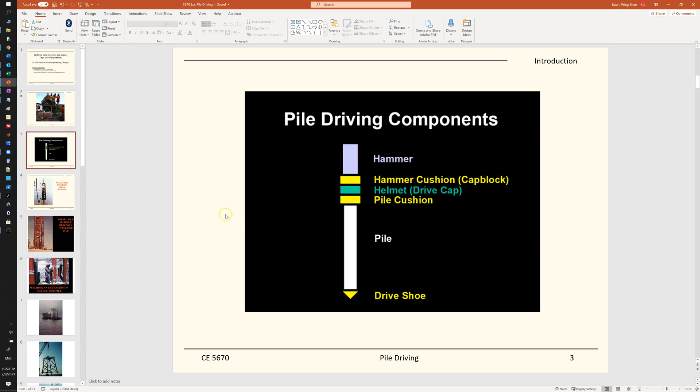Which type of different method or what kind of hammer we use is kind of beyond the scope for this class, but it's like an art of geotech design. You need to find and calibrate yourself before you drive the piles.

You need to do all the engineering analysis based on your soil profiles, like the bearing capacity of the soils, and whether you're hitting the bedrock. You should know all this information.

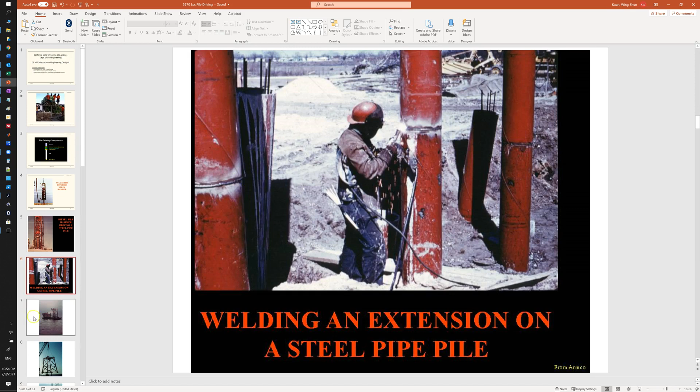Geotechnical engineering also takes care of offshore structure foundations, particularly from the 60s to 80s, the golden age of the oil industry. Now maybe we're shifting to renewable energy, like building offshore windmill foundations, which is another monster and a different type of challenge.

We may not go to deep sea for near-shore windmill projects; you'll have foundations at different soils, likely dense sand, rather than going to the deeper and deeper seabed offshore for oil.

A couple decades ago was the golden age of geotech engineering in the oil industry. We built tons of offshore foundations in the North Sea between Norway and England, also in Western Australia, and in the Gulf of Mexico near Houston. There was a lot of fancy offshore oil platforms to build.

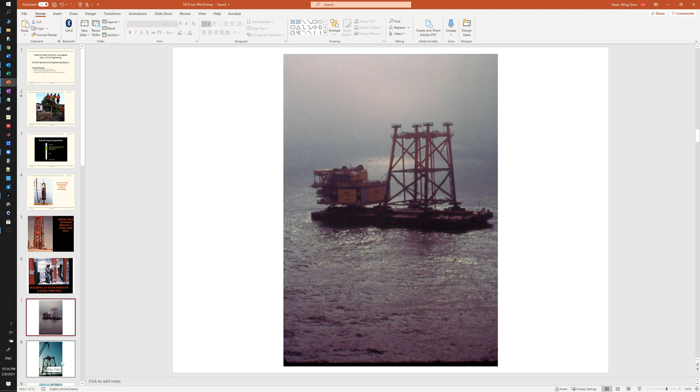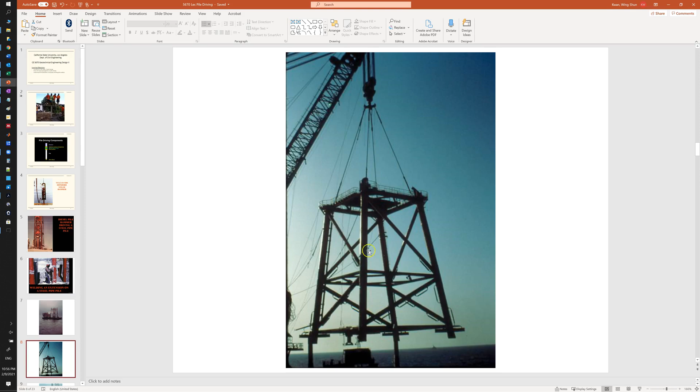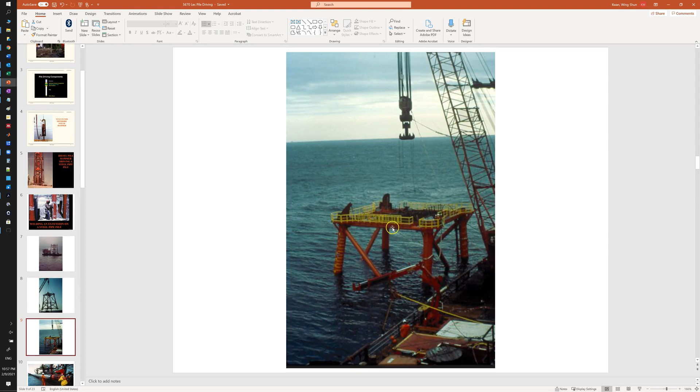Here's an example of an oil platform. In order to get the oil, we need to stabilize this platform and drive the piles in offshore environments. That's another challenge. You see the crane there - this is a foundation platform with four supports that you're going to drive piles through. We lower this kind of platform to the sea, to the proper locations, and then those are the piles we're going to drive.

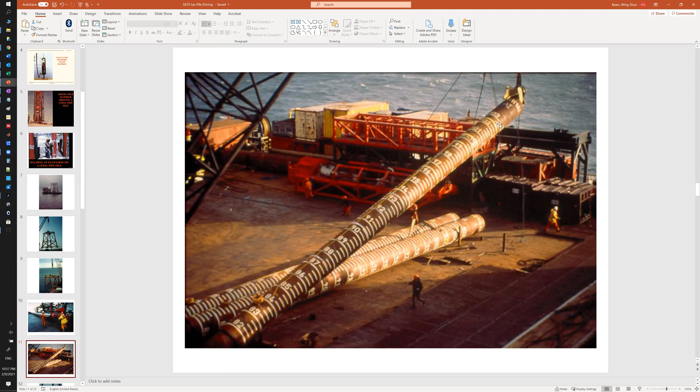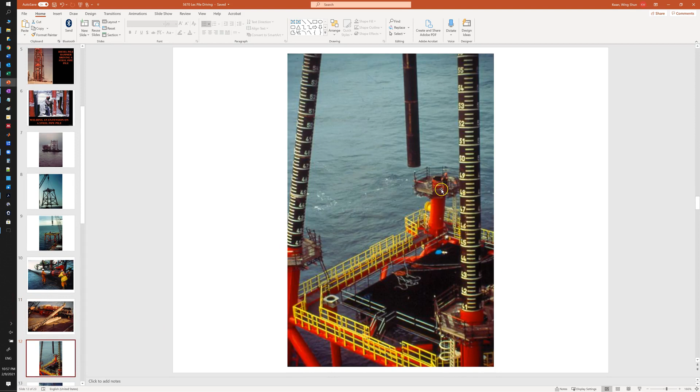It's very fancy, super long steel piles. We lift it up - this one is up to more than 100 feet, I think even 100 meters. We install those piles on our oil platform, and we do the pile driving at that point.

What we try to learn in this lecture is through those dynamic poundings, dynamic driving of piles, we try to retrieve the information we need.

Remember back to our undergrad class where we talked about axial capacity of piles. We use those static methods, the alpha method, beta method - those give you analysis results. But think about it, when you drive a pile, you get all the information, the response of the pile and the blow counts when you're pounding on the piles, and that information can help you confirm your design or give you additional information.

That's why pile driving is another huge topic in deep foundation design. It can complement the static method we learned - alpha and beta - or sometimes it can be even better. In a scenario like offshore environments, it's really hard to get soil samples or do geophysics or site characterization to know the soil properties deep sea, because the depth of the water until you get to the seabed could be another 100 meters. The best chance for us to get the response of the piles or more accurate information is by doing the pile driving.

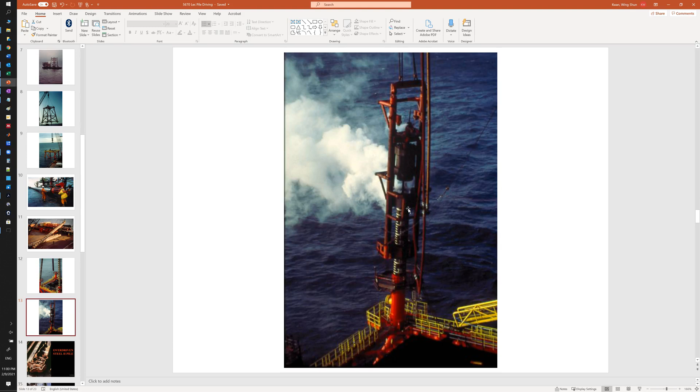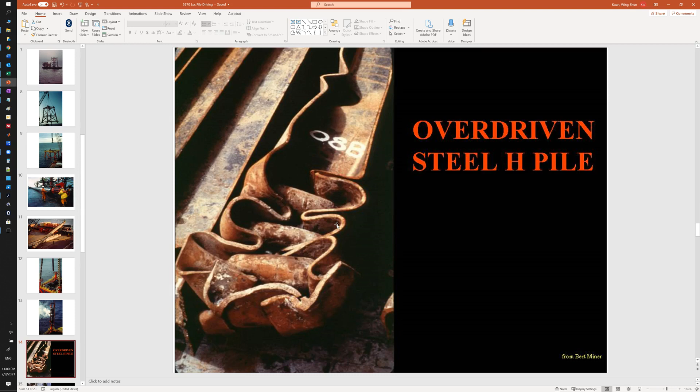So this is pile driving, and that's what we try to get to in this lecture. Again, you don't want to overdrive your piles. If you overdrive your piles, the hammer is too much for the soil - meaning the soil is too strong and also the hammer is too big. Then overdriving of the piles could happen. You really don't want this to happen.

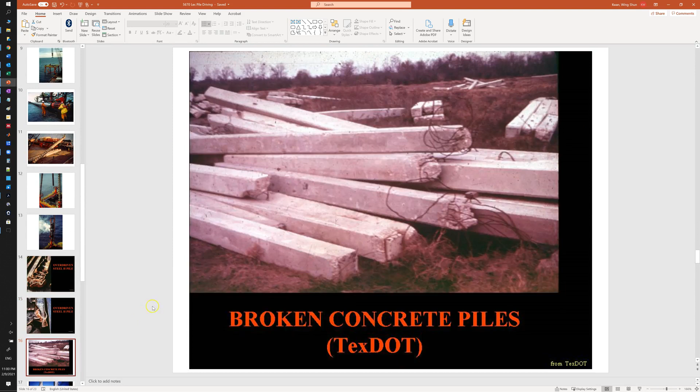You can also fail the concrete piles. A failure of precast concrete piles - if we didn't do our job properly, this could happen.

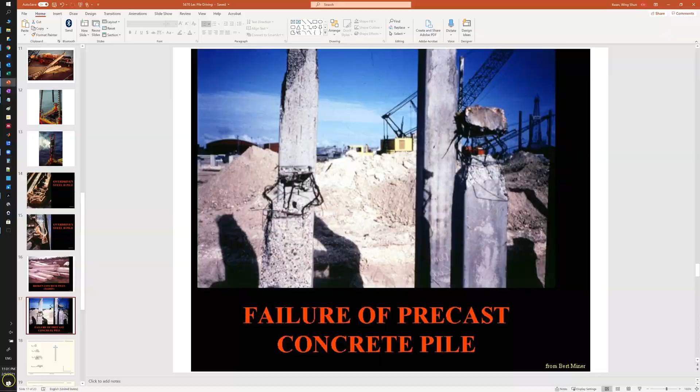Okay, so pile driving formulas. In the early days, to analyze what happens to the piles when driving, you start with some basic assumptions. First, you assume that the body of the pile is a rigid body in motion. And based on energy conservation equations...

They came up with this formula below, which gives the ultimate pile capacity under driving. This is different than the static pile capacity - the two can be very different. The dynamic capacity during driving versus the static loading capacity are under different loading mechanisms. Static loading versus continually pounding on the piles gives different loading mechanisms, which can end up giving a very different ultimate capacity.

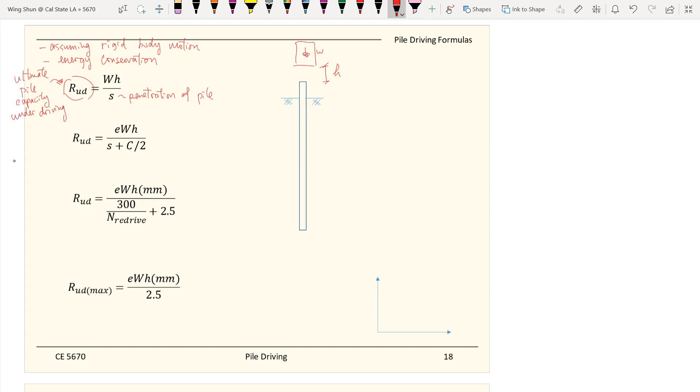But it comes with a lot of shortcomings because it does not reflect what really happens when driving piles. First, the shortcoming of the equation is that you must have energy loss.

So energy is not conserved. There are a lot of different kinds of loss. You lose some to sound, right? You remember how loud it can be when driving piles. You also lose a lot of energy to friction when you're pounding the piles. There's friction loss to the soil, and also friction loss when the pile pounds on the helmet and on the cushions. The cushions, the wood cushions, are meant to absorb some of the energy so that there's no direct metal-on-metal contact, and that also causes a lot of energy loss.

Second, the pile is not rigid. It's not a perfectly rigid body because it's under very high stress loading. So no matter what, the pile will compress elastically, or maybe even fail. Also, it's not a one-way kind of penetration.

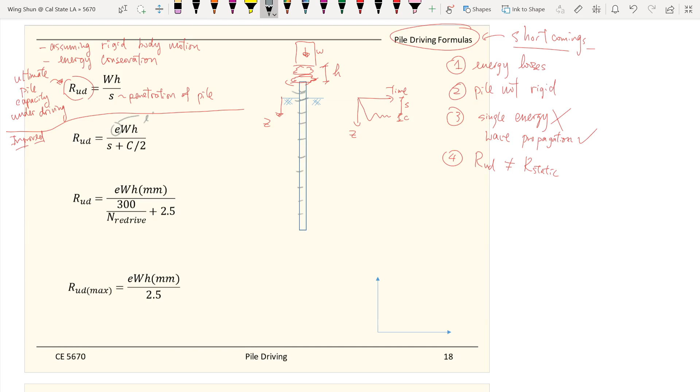In light of that, there's another version, an improved formula - the second formula. So does it improve on the first one? It makes some slight changes. It has an effectiveness, or efficiency, factor to try to capture the energy loss. And in light of the shortcomings we mentioned, it now has a second term - this is the elastic rebound that we talked about.

Another improvement, or way to make it more practical, is the formula below, which tries to represent the penetrations by the number of blows.

So this N here is equal to the number of blows per 300 millimeters of penetration. Making it more practical is just by setting a certain interval, which is 300 millimeters. So every advancement of 300 millimeters, they keep counting the number of blows from the pile driving, so they can set up.

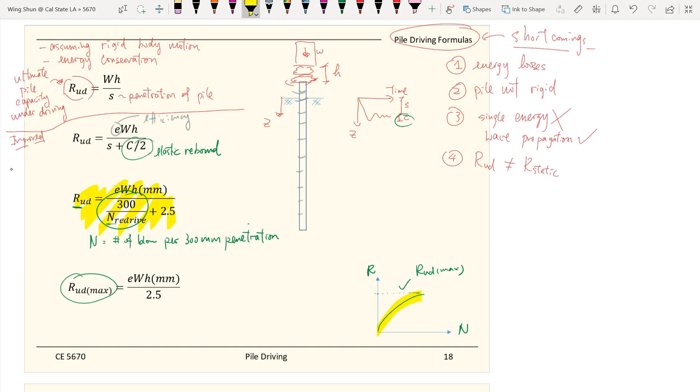of the driving process. But the big picture here is what we learn from this: these simple forms of pile driving formulas are simple. It's a good starting point, but they cannot answer all the shortcomings that we talked about.

In the very first versions of the equations, you didn't talk about energy loss, even though we try to capture it with the efficiency factor here, but it's still not fundamentally looking at this problem correctly, because it still doesn't answer the part that the pile is not rigid, and also doesn't answer

the part that this is actually a wave propagation phenomenon, not just a conservation of energy setup, and also it's just not able to tell you the information about the static pile capacity.

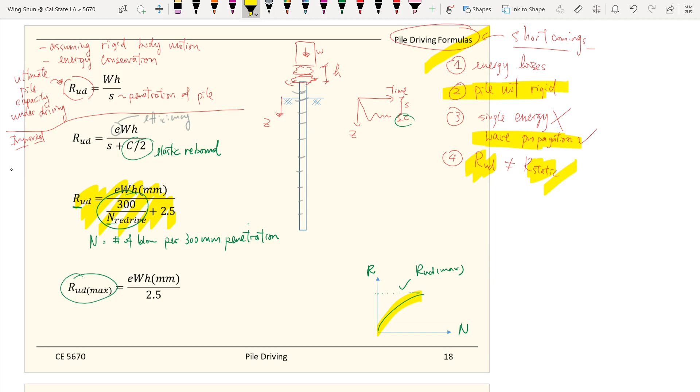So we need something more advanced to look at this complicated issue, which we will talk about: wave propagation analysis. So if we look at segments of the piles, we talk about how the wave propagates through

a pile in terms of velocity, and this is useful for finding the pile's information during dynamic driving. This wave propagation method is found to be more reliable than the other pile driving formulas that we talked about in the previous two slides.

So using a more physics based approach can get around the shortcomings we have, because now we're looking at velocity rather than global energy. So we focus on how the particles of the pile propagate throughout the driving process, the pile driving process.

So in a way this is more fundamental and more science based, which will give us more accurate results. But again, there are some assumptions going on, and another trade-off is it requires much more computational power and a basic understanding of physics and math from engineers.

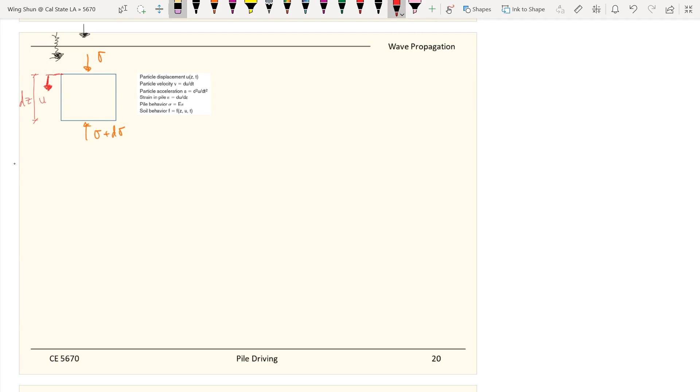So this is the traveling velocity - the particles are traveling. There are many small particles traveling through the pile, because the pile is made up of many small particles. Let me do a better job here.

So the displacement u will change with depth and with time. The way the pile particles travel through the pile depends on depth and also depends on time. So it's a function of z and t.

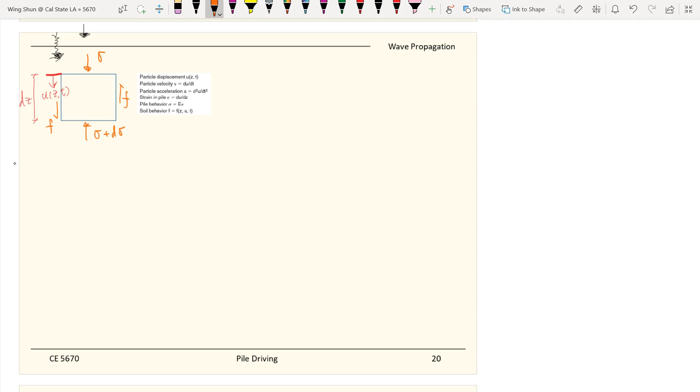And also we have our side shear, because the pile is jacking along with the soil. So we have F here, which is the friction force, which we call the soil behavior. These are functions of depth and the particles as well.

So U here is the particle displacement - how the pile is actually moving at a very small scale. And once we know U, if we differentiate that, we get the particle velocity.

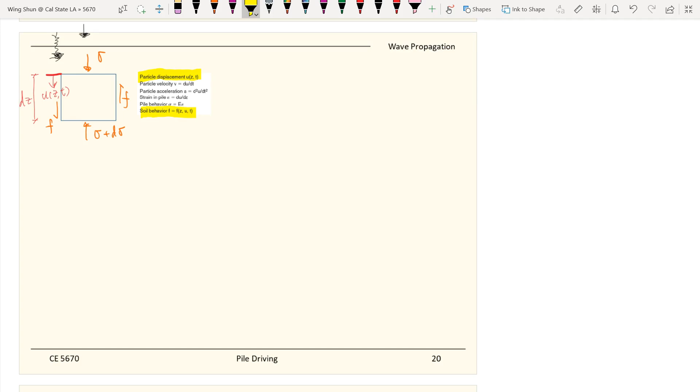And if we differentiate one more time, we get the second order differential equation that gives us the particle acceleration, and the constitutive model of the pile, which is perfectly elastic here.

So we have the perfectly elastic pile, which means the pile stress-strain behavior - this is the strain, this is the stress, it's perfectly elastic, described by the elastic modulus E.

And the strain in the pile will be defined by epsilon. Epsilon equals du/dz, the change in the vertical direction of the pile displacement normalized by the change in the vertical direction, z.

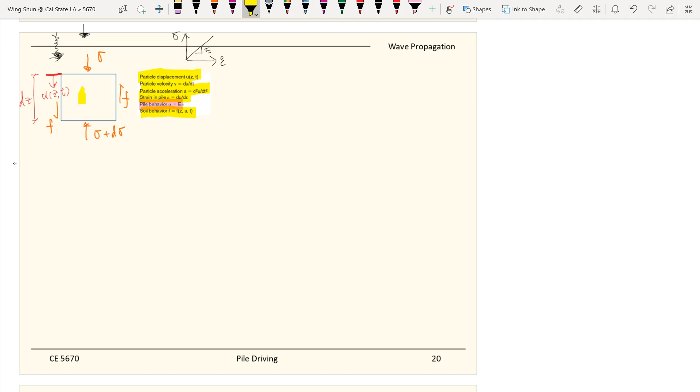And we have the counter force, right - this is Newton's second law. Overall, the movement of the pile is the mass of the pile times the acceleration of the pile.

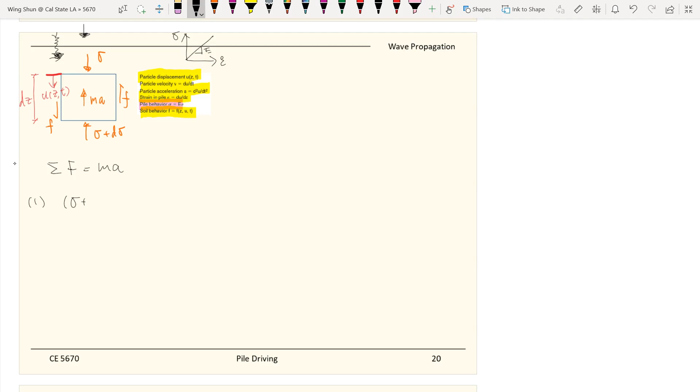And if we apply Newton's second law, F equals ma, and the force that we have - A is the area of the pile, so the upward force minus the downward force, plus the side friction.

And this P here is the perimeter. So we have the pile perimeter times the side friction, times the vertical segment. That gives us the side shear force.

So this is our force equals the mass of the pile, and the mass of the pile is the density of the pile times the area, times dz. So A times dz is the volume, which gives us the mass of the pile, and then times the acceleration of the pile.

We differentiate the displacement two times, then we get the acceleration. So F equals ma.

And we also consider the constitutive relationship of the pile, using the perfectly elastic model to describe the stress-strain relationship. So the stress will equal the Young's modulus times the strain - the Young's modulus of the pile times the strain, which is du/dz of the pile.

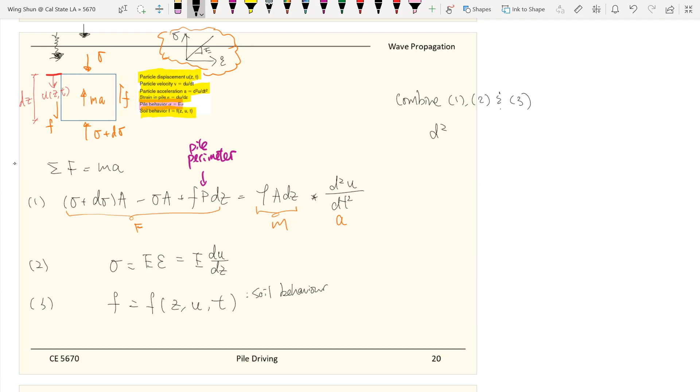And if we combine the three equations, then we get this differential equation to describe the wave propagation during pile driving.

So again, the E here that we talk about is the pile modulus. And this particular term we talk about here is the pile acceleration, or the pile particle's acceleration.

So this equation here pretty much is the governing equation of wave propagation. So if we want to find more pile information, like during driving, we solve for these equations, and the computational package software that you use for pile driving pretty much uses a finite difference approach to solve for this second order differential equation to try to capture the physics behind pile driving, treating the pile as moving in terms of small displacements that change with depth and also change with time. That's why it's differentiated by dz and also differentiated by dt, capturing the soil behavior in the third term right there.

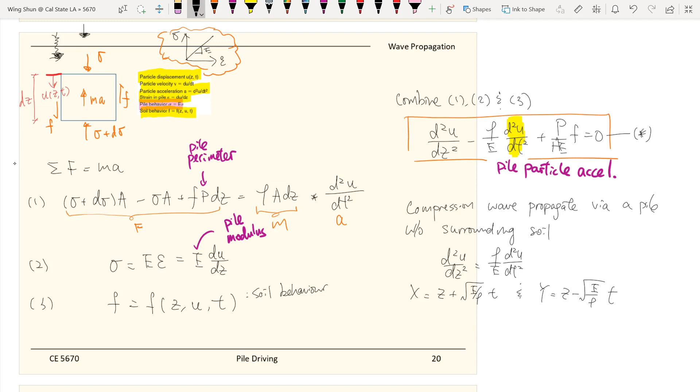So here, what we're doing is purely mathematics. We play around with the differential equations by making some substitutions to simplify the terms or equations with mathematical terms, but not really changing anything, just playing around with the terms, and then we substitute x and y into this two-term second order differential equation.

So this double star equation becomes a much simpler form with the two transformation terms that we have made.

And then here we realize we solve for this, because at the end of the day, what we're interested in most is U, which is the pile displacement. So fundamentally we want to understand when we drive the piles, how much movement there is in the pile. We set up the differential equations. If we're able to solve these differential equations, then we can solve our problem, because we can mathematically model how the pile behaves, moving upward and downward, when we're driving the piles.

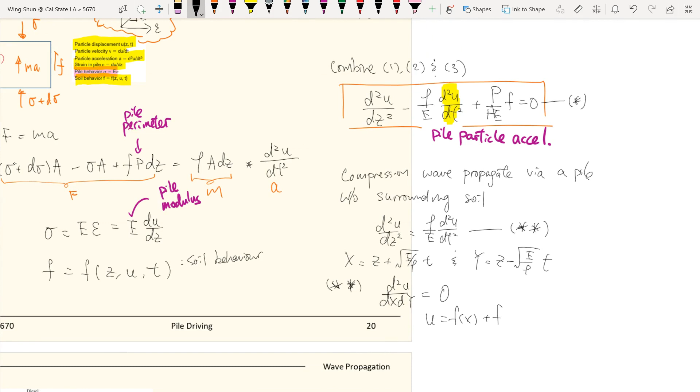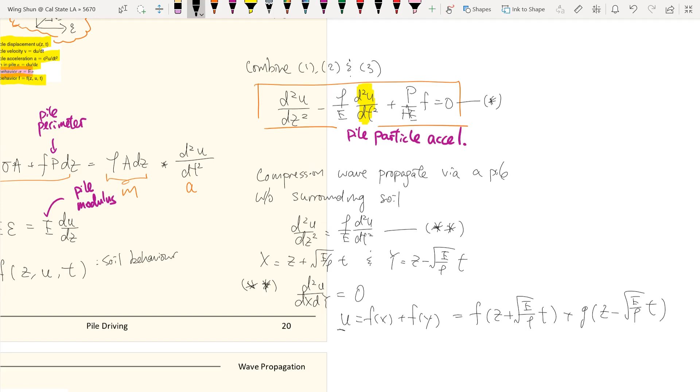So the displacement will depend on these two functions, and we understand when we drive a pile, this gives us the displacement, giving us an idea of how the pile would behave when we drive it. So at a certain location, depth, at time t, versus at a location that's further down, with travel distance of delta z, and then at time plus delta t.

So if we make use of time steps here. Another concept that's very important when we solve these differential equations is that we want to use time steps. So next we will do examples to see how, numerically, we can solve for those equations by considering time steps.

So now we have a time step of delta t here, by traveling a small segment of the pile. And if we want to find out the velocity, the wave velocity here, we call it C, and it's the change of displacement divided by the change of time. This is the wave velocity.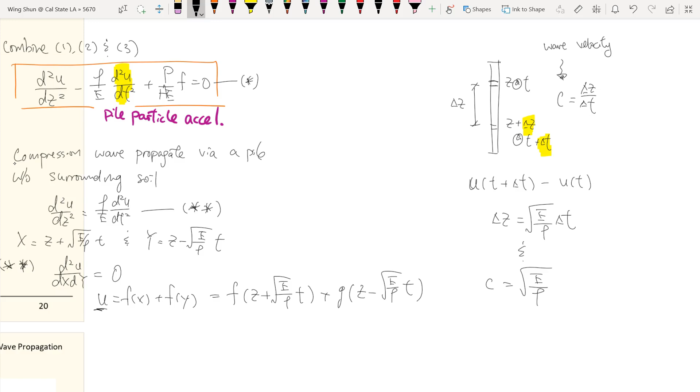So we can simplify the wave velocity in terms of the material properties by making some assumptions to get there. So what we're doing here is just trying to physically understand what's going on, or walk you through the physics behind wave propagation in the problem of pile driving.

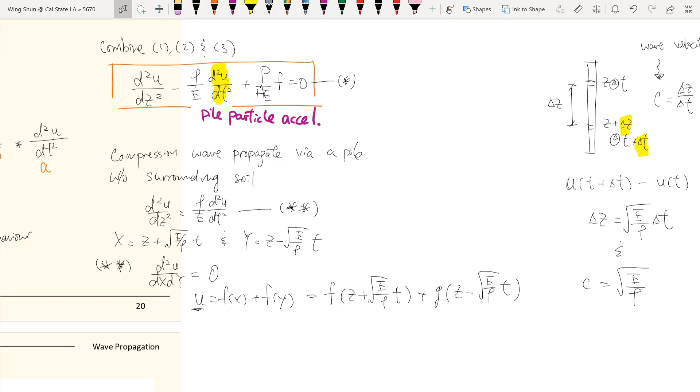Next, we will do examples of how to make use of this framework of wave propagation to model actual piles, driving piles, using a finite difference approach by hand to walk you through how to work out the math. Now let's talk about a numerical approach to solve the wave propagation problem in piles during pile driving.

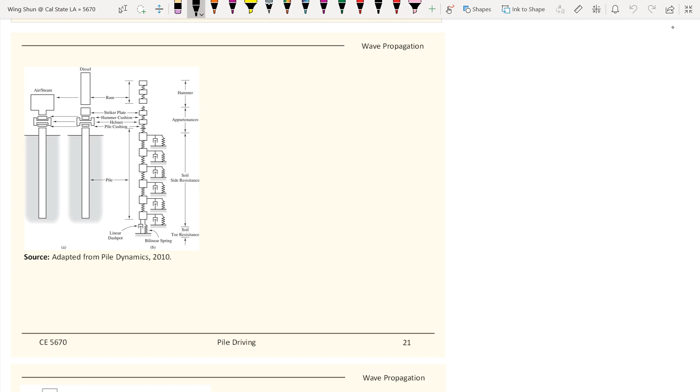I'm talking about pile driving. You have different components: of course the piles, and also the hammer. The hammer can be a diesel type of hammer or a steam/air type of hammer. Then you also have the connection part, where the strike plates, the cushions for the hammers, the cushions for the piles, and the helmets are. That's another segment of the piles, and all three together make up the pile driving mechanism. The discretization helps us use a finite difference approach to solve this wave propagation phenomenon.

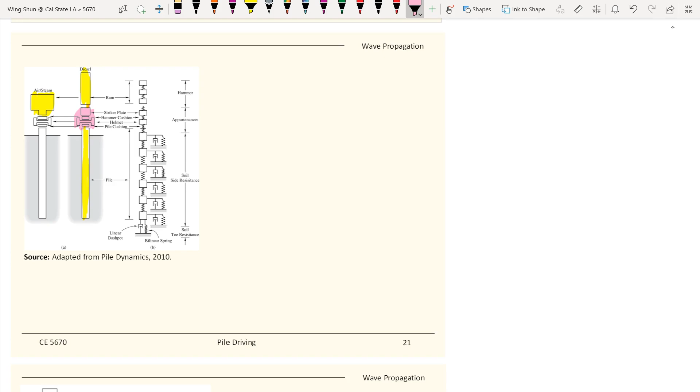So for example, here it has at least three parts. First, you have the hammer part: you need the weight and also the stiffness of the hammer. That's the first part. We break it down into different parts, and you assign material properties for each.

The next basic part is the part that connects the hammer and the piles, so all the other stuff like the hammer cushions, the pile cushions, the striker plates, and the helmets. With that, the same thing: you also need the weight and the stiffness to describe this part.

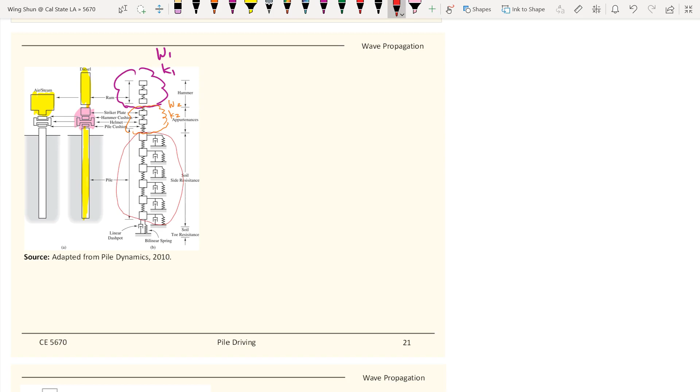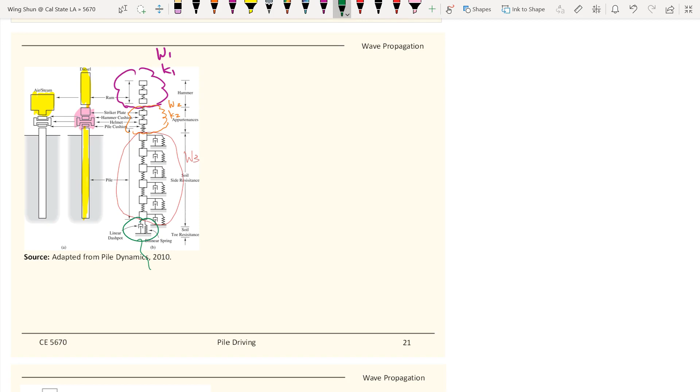Last but not least, you have the piles, for which you need to talk about the weight. When I say the piles, I mean to include the part of the pile excluding the pile toe - that's the third part. And here is your pile toe, which you would describe with a Q-z curve.

So that's how we do it: we break it down into many little parts, and for each element we assign the weight and the stiffness. Now, basically, I only broke it down into three different parts, but actually within each part you need to further break it down into more and more elements. The more you have, the more accurate your numerical analysis will be, and when you're doing computer programming, you will break it down into many.

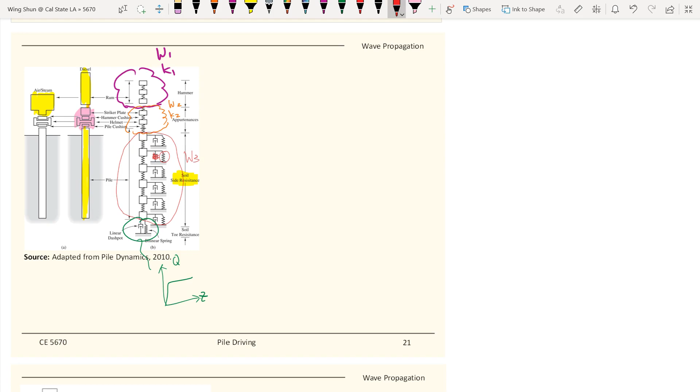Remember the wave equation has the dz terms there, which means the pile displacement properties highly depend on how far down you go. The soil behavior, and the dashpots representing damping, and the spring stiffness, all change because the further down you go, the stronger the soil is with more confining stress. Each spring has its own stiffness, and those stiffness values and the dashpots representing the damping of the soils need to be updated.

But for the examples we're going to do, we will just base it on three elements as minimal so that we can do hand calculation examples. So how the numerical analysis works is we look at different wave propagation information within the piles during pile driving.

The first thing we want to look at is the displacements of the pile particles. So the displacements of the piles at a certain time step. This m here is the mass number.

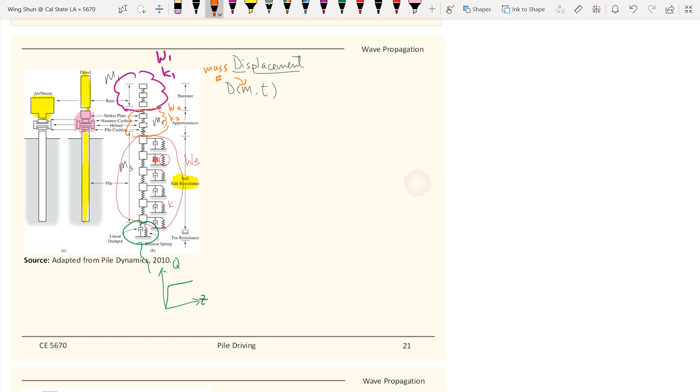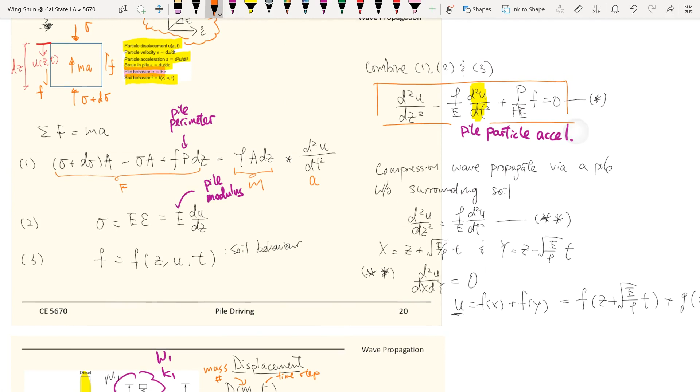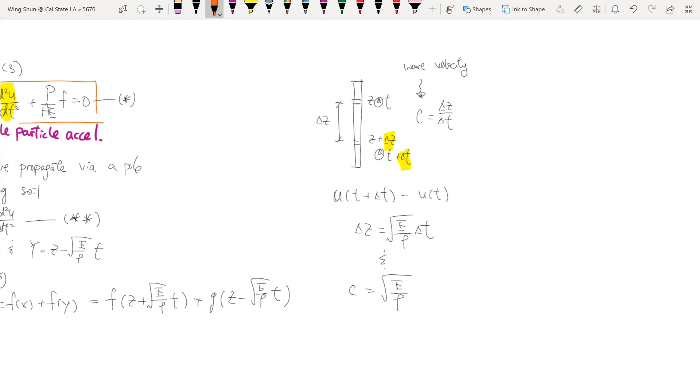This time step is the same dt in this formula, and in these equations. So the time is at certain time steps of the pile particle traveling. The next time step will be t plus delta t, so that's the next time step.

For the next time step, you need to know how small the delta t is. The delta t recommended by the original author for this wave finite difference solving approach is delta t equals delta L, which is the length of the elements. In this case it's the whole pile, but in real computations you do this for each element. So it's delta L divided by the square root of the modulus divided by the density of the piles. That is the recommended time step.

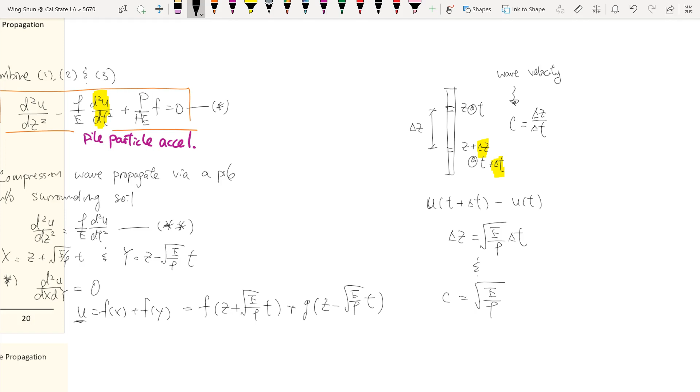So what we are doing here is numerically looking at small segments of the piles and seeing how the information, how the status of the piles, changes. Information number one we are looking at now is the displacements. So the displacements will be equal to d.

So the displacement of the current mass at the current time step equals the displacement of the current mass at the previous time step plus the velocity of the current mass at the previous time step, times delta t.

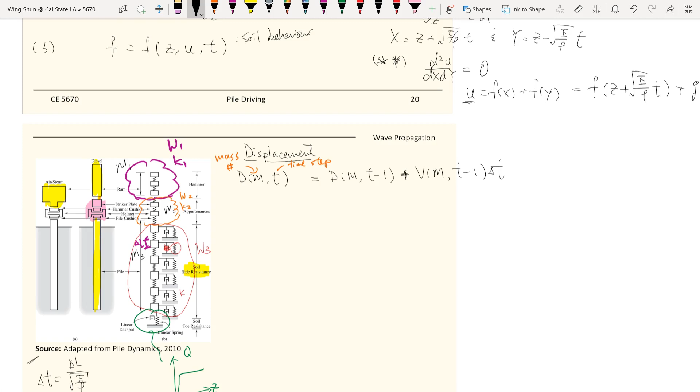So the delta t will be computed by this equation, or determined. You tell the computer to do this. This is our recommendation because the time step cannot be too large. You want the time step as small as possible. But if you make it too small, there will be too much computation power needed. You will freeze your computer software, or if you do a hand count, it will become insignificant. So this delta t is recommended by this formula over here.

This is the minimal time step as small as you need to have a reasonable analysis. So this is solving for the displacements based on the information that you have. The velocity, you can find that out by the drop hammer. Because the very first, if you think of M1 as your hammer, then the very original time step is when you drop the hammer.

So that one is easy to find, easy to measure. This is information you can get because you're controlling the hammer. So the velocity of the first impact of the pile, everything starts from there, and then based on the velocity you have, the time steps, you're able to calculate the displacements. So based on the displacement of the prior step, and the displacement of the prior step at the very beginning is zero. We will work through examples and see a hand count and see how things work.

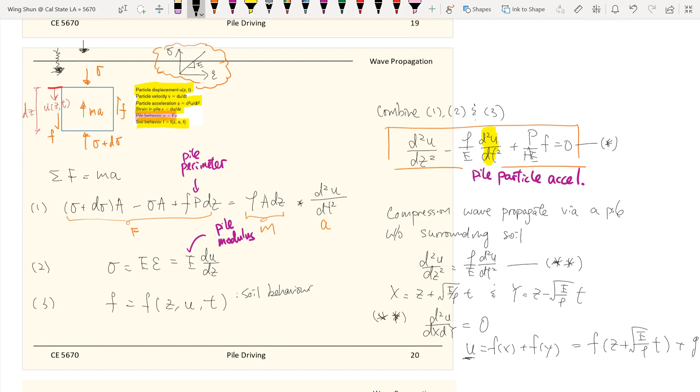And in this analysis method, the next part is you want to find out the soil resistance. Remember, fundamentally, when we talk about wave propagation, we have a soil behavior part. So the nice thing about this numerical analysis approach is it helps you to also discretize the whole pile. It helps you solve for these pile-soil interactions. So this is the nice thing about wave propagation—it helps you break down your pile and find all the information you need.

So this is what a computer thinks like, or how people program it. Hopefully going through these examples, although a little bit tedious, helps you better understand how a computer program, or how people code a computer program, behind it. So next time when you use a computational package, you'll feel more comfortable with what's going on. You'll be the engineer knowing all the physics and all the setup behind it, rather than just pulling up a software, following all the steps, clicking all the buttons, and finding the answers.

That's not very sound engineering. Engineers should understand what's behind everything, or at least have a good idea of what's going on. Otherwise, it can be quite dangerous, because if you just follow the procedure of a software, you could go in the wrong direction without knowing what's going on. Some very basic questions: how should you set up the time steps? Why does this time step make sense and why doesn't this one? And how is the design scenario, or how is your computational package, modeling the whole thing?

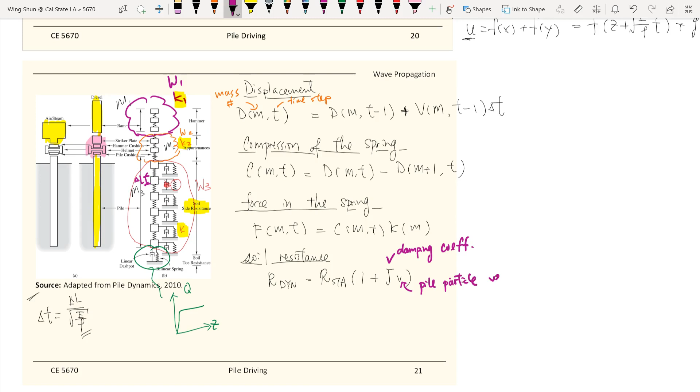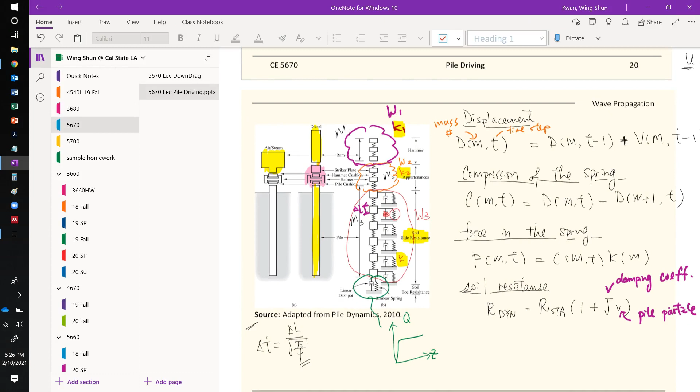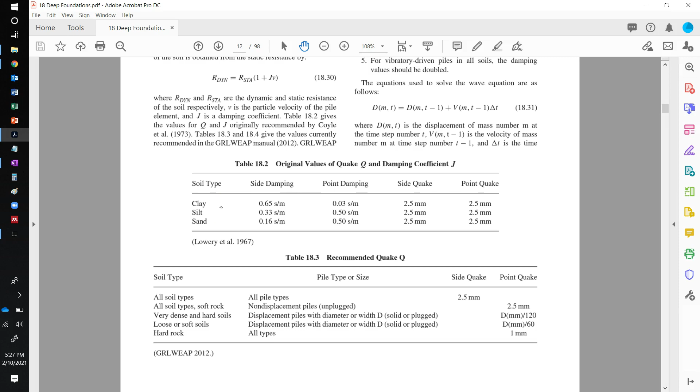It highly depends on the damping coefficients. Your textbook has recommended values for this damping coefficient based on different soil types. If you go back to your textbook, you'll find recommended values for the damping coefficient J based on clays, silt, or sand.

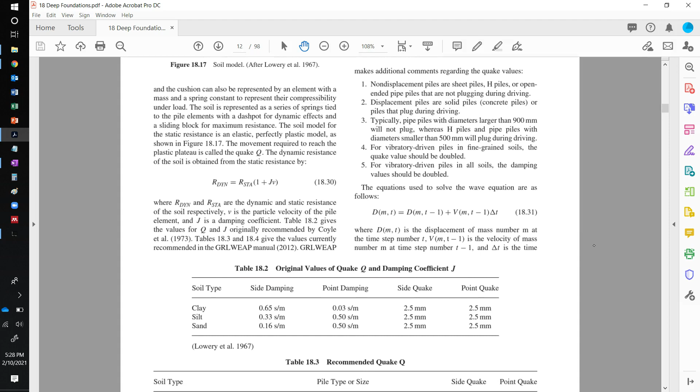They give different damping values to pick from based on different references. There's a Lowery 1967 reference, and a more updated 2012 reference, giving different J values. The 2012 reference is from the GRLWEAP manuals, a very popular reference for pile driving. Based on whether you have coarse grained or fine grained materials, you use different J values for the damping coefficients.

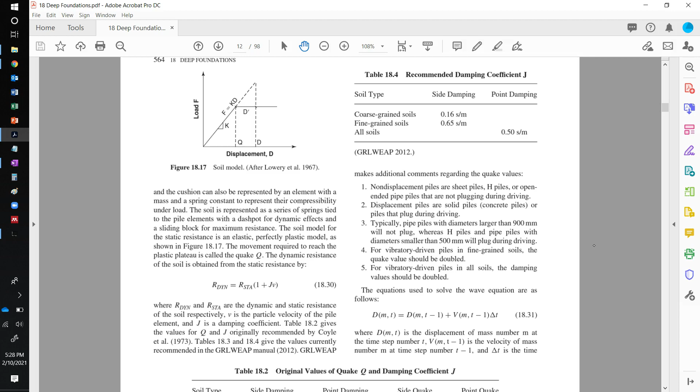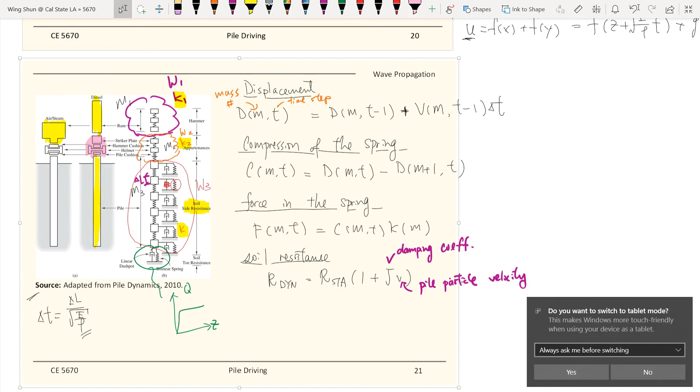And the V there is the pile particle's velocity. Based on these formulas, we can go ahead and find the soil resistance.

Based on time discretization, like this finite difference approach, we are using this: the resistance at the current mass and current time will equal the displacement of the piles minus the D prime term -- we'll talk about what that is -- times the soil spring.

So it's essentially the displacement times the soil spring -- that's the static part -- and then times the following terms: the damping coefficient, which we can find in the tables we discussed, and the velocity of the piles as a function of the current mass.

The velocity depends on which mass or element we're talking about, at what time step, based on the previous time steps. That is the soil resistance part.

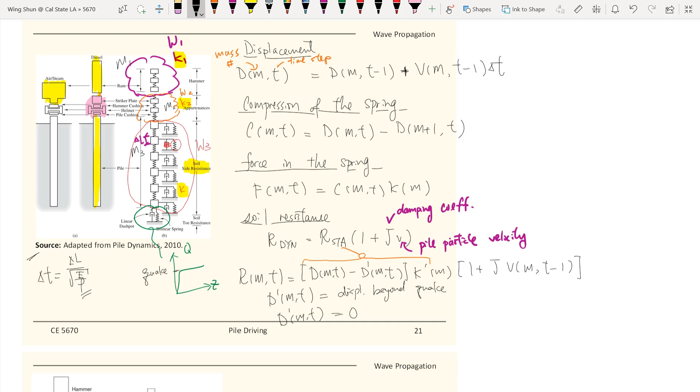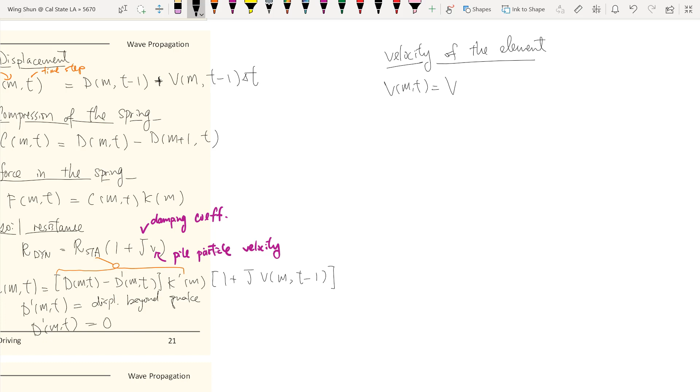Last but not least, the final piece is the velocity of the pile elements. The velocity equals the velocity at the previous time step...

...plus the force from the previous element at the current time step, minus the force at the current element at the current time step, minus the soil resistance. So try to work out the resultant force here.

This takes care of the soil behavior, then times gravity g and the time step, and then the weight of the pile element at the current mass or current element. So that is the velocity of the piles.

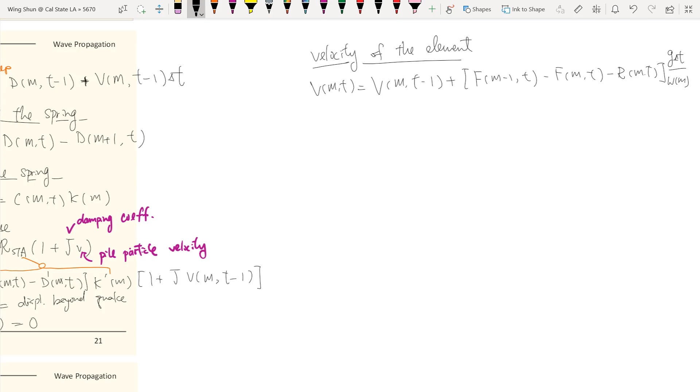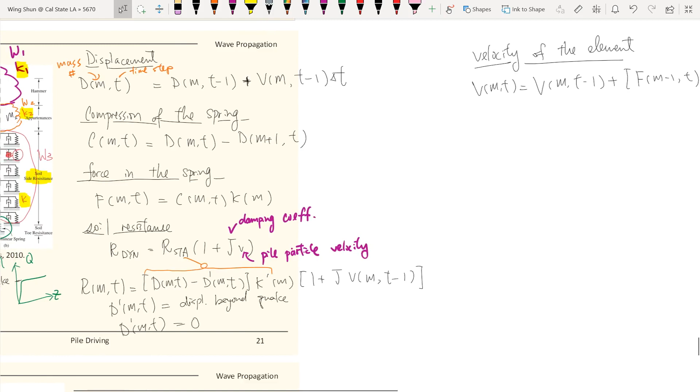This is like a discrete wave propagation analysis, based on how you divide your piles into different elements and different time steps. Always remember the way it works: moving from element to element, time step to time step. You need to really understand which element and which time step you're talking about.

We'll work through examples, which will help you understand the math behind it. Hopefully doing all this will help you understand what a computational package or program would do for pile driving analysis.

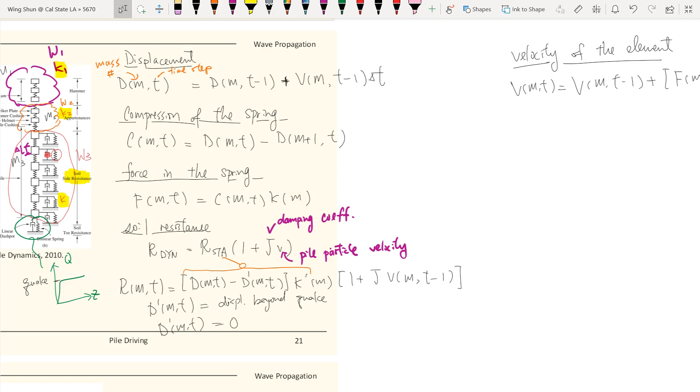In the recap, the wave propagation method, also using the finite elements approach, is kind of like modeling a horizontal bar - like putting your foundation sideways, similar to when you're driving piles. It's kind of like you set this up in the lab. You have a bar, could be concrete or steel, and then you punch.

You give an impulse, punch on one end, and imagine you can have all kinds of instrumentation in the lab you want. Accelerometers would be very good to use in this simple experiment, and then you can measure all the information like the accelerations, and then integrate to get the velocity.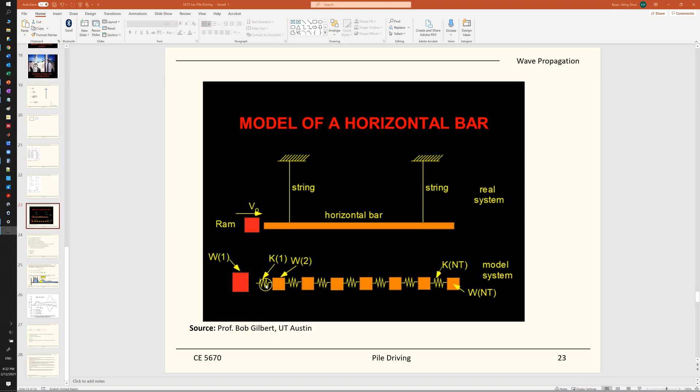You attach the bar by the spring, which is kind of like mimicking the soil response, and the bar has its stiffness. The materials like the metal have properties like the modulus as a stiffness, and then you could model it as many different springs.

So that is the wave propagation setup. If you look back on the history of this type of analysis, it started many years ago, more than a century, a little less than a century now, starting from 1931. Someone originated the wave equations, and then Fox in 1932 presented the closed form solutions, the exact solutions for the wave equations, without much computational capability in those old days.

You didn't have a computer, and then engineers started to apply these wave equations in applications of geotechnical or civil engineering. Back in 1938 - that should be starting around Terzaghi's time already - so the birth of geotechnical engineering is already there back in 1938, and people started to look at applying these wave equations to pile analysis.

In 1955, even though people think this is the best way to go for pile driving analysis, with still much limited computational capability in old days, it wasn't quite popular until the 50s, when computers became able to carry out a lot of iterations or solve differential equations. So the first computer code was developed.

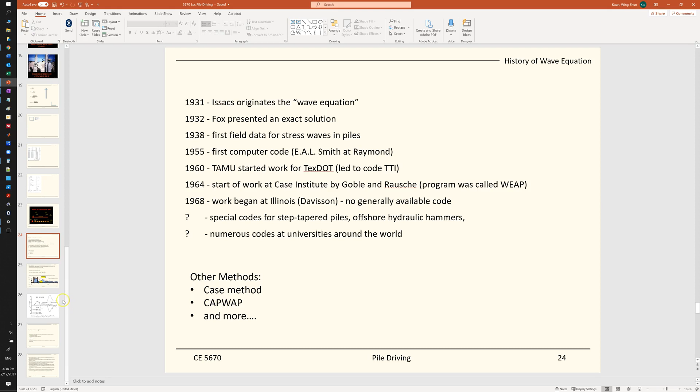So this CAPWAP approach is one of them. You need additional information, which is obtained by using some strain gauges and two accelerometers.

When people drive piles, remember at the beginning of the lecture we looked at the size of those piles. It's huge, which means expensive. So you won't hurt the budget much by embedding one or two simple instrumentations like accelerometers or a strain gauge. Even if you put accelerometers at the bottom of the piles, you never retrieve them for each pile. That's fine because those are not very expensive, and you're just using one-time use instrumentation, not a big deal.

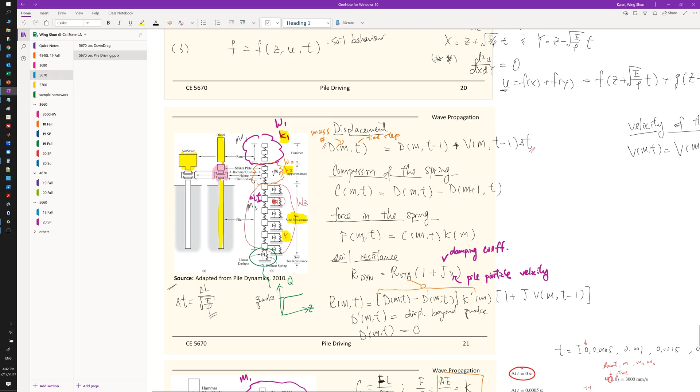After you have that information, you can calculate the force. This method is pretty much just giving you calibration data. After you have your data recorded in the field, you keep calibrating your wave propagation analysis that we talked about previously. Remember those symbols from the analysis we've done. You keep calibrating those analyses, some parameters or procedures, fine tuning it until your analysis results match the recorded results. So this is the big picture of the CAPWAP method.

There's some real data that people record from the field. They have the free pile solutions and the measured force, and they try to match the two. You cannot get a perfect match, but you keep iterating or doing parameter sensitivity analysis until you get the one closest to it. This way is powerful because you have your theoretical base model, but now you also have your field data, and it allows you to do the calibrations based on site-specific pile driving records.

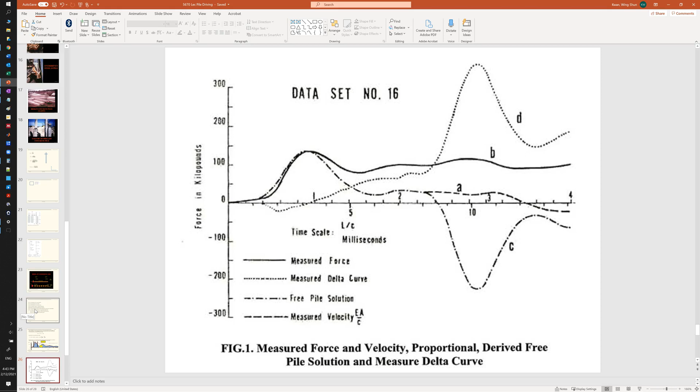The other method is the case method. Pretty much, you try to calculate the pile capacity based on the force and the velocity that you measure, and you also take into account the pile mass. So these are the equations they use to estimate the pile capacity. Again, this is the pile driving capacity, not necessarily the static capacity that you estimate from another approach.

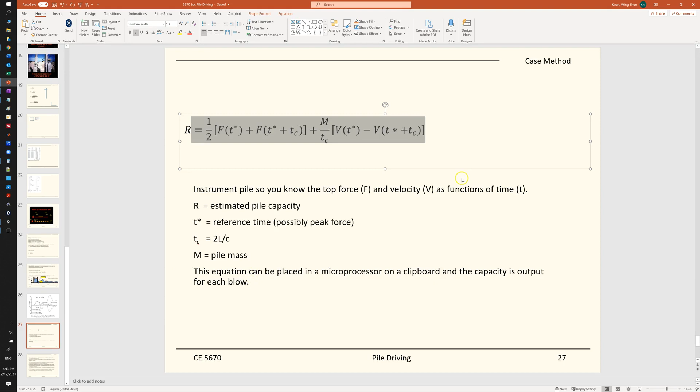So both the Case method and the CAPWAP method, I just want to give you an idea of what's going on. This is pretty much a more advanced and more practical approach that people use. When you practice in this field, you realize there are a bunch of different methods, but more or less they're doing the same thing. The concept is they try to get real-time data on site for your piles, and then calibrate the wave propagation model such that you get a good match.

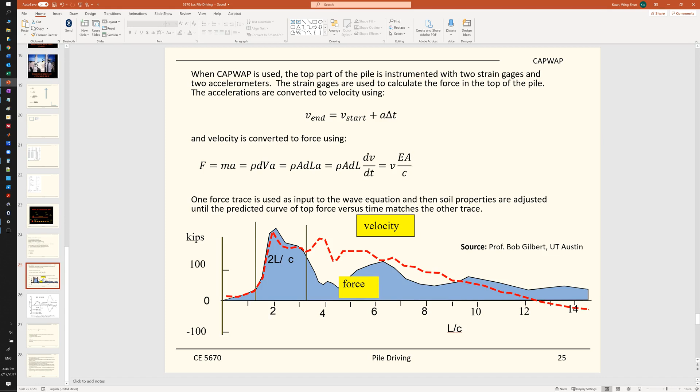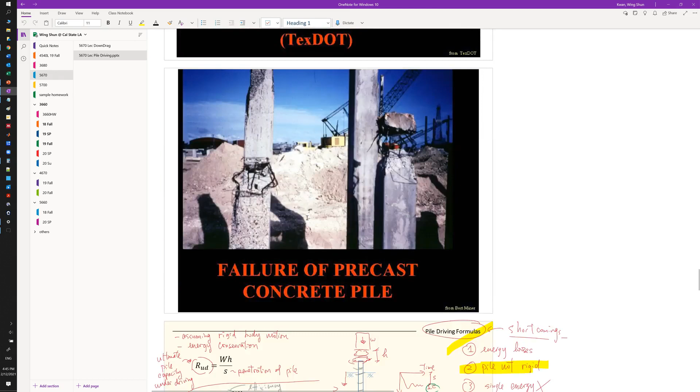So, last but not least, some summaries for this lecture. The wave equations we talked about are much better than the pile driving formula, the energy-based pile driving formulas that we talked about very early in the lecture. The wave propagation framework will be much better than those pile driving formulas based on energy conservation or some modifications that come with it.

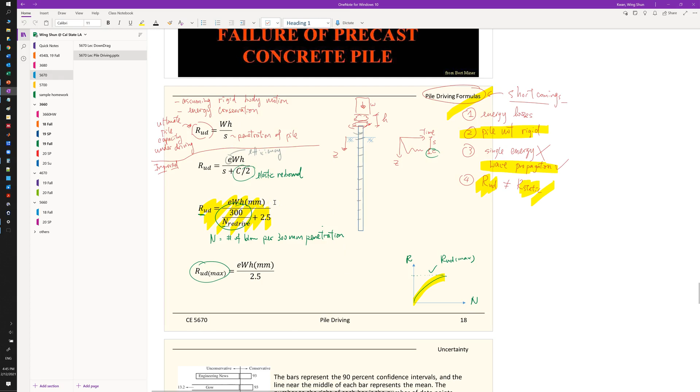This is not accurate at all, put it this way. The wave propagation approach is a great improvement, but there are still some substantial differences between the wave equation predictions and actual values like the stress. Because the pile driving phenomenon, or process, is really complicated, the wave equation approach gives you a good head start, but it's still really hard to explain or capture all the complicated factors you may have from pile to pile, site to site.

For geotech engineers, we adopt a particular code and then adjust the maximum allowable stress to reflect local experience. So those are the other methods we talk about, the case method, also the CAPWAP method. These are different methods to try to calibrate yourself or calibrate your models based on some measured data.

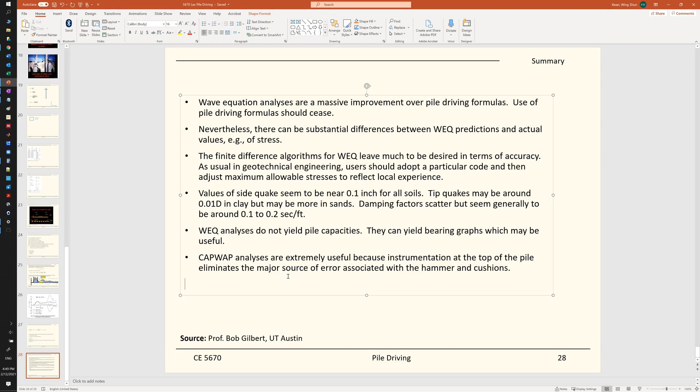In this lecture, we will talk about pile driving, with a couple of learning objectives. First is to introduce you to the topic of pile driving, which is very complicated and is one of the most advanced and difficult topics in geotechnical engineering. We will talk about wave propagation in pile driving, which is the best approach to analyze the data we receive on this topic.

We will use a finite difference approach to solve for the wave, setting up the wave equations so we can look for the information we need. We'll talk about that more. Last but not least, this lecture will help you understand the limitations of dynamic pile driving analysis.

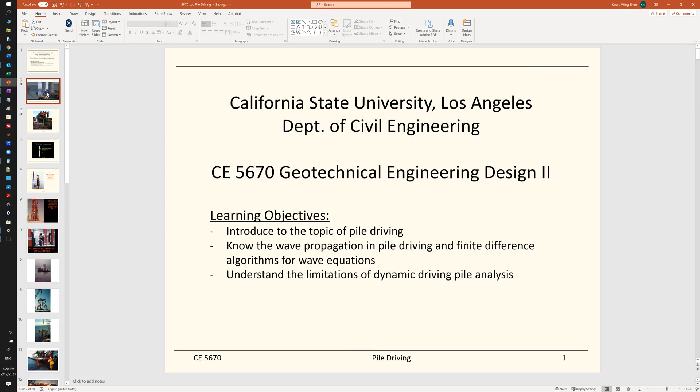So here, let me give you a quick demo on pile driving.

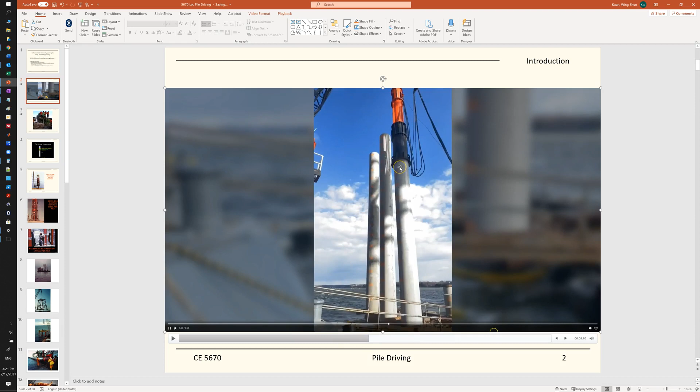You see we have the long piles here near shore, and I hope you can hear the sound - may not be doing so well - but that pong, pong, pong sound comes from, I believe, a hydraulic hammer. You have all this power or oil cable connecting to a hydraulic actuator or hydraulic pump, pounding on the piles.

The topic of pile driving we'll cover later tries to make use of the information we receive, or the data we record, during this pile installation process, to recover information that can help us with pile design, and also to make sure that during this pile design or pile driving process, we are not failing the piles.

So this is what we need from pile driving. The pile driving capacity we talk about is under dynamic conditions, which could be very different from the static conditions when you design pile capacity, as you already learned in CE 4670, the previous geotech class. The alpha method, beta method, those analyses or homework you just did were based on static capacity, but now everything is dynamic during pile driving.

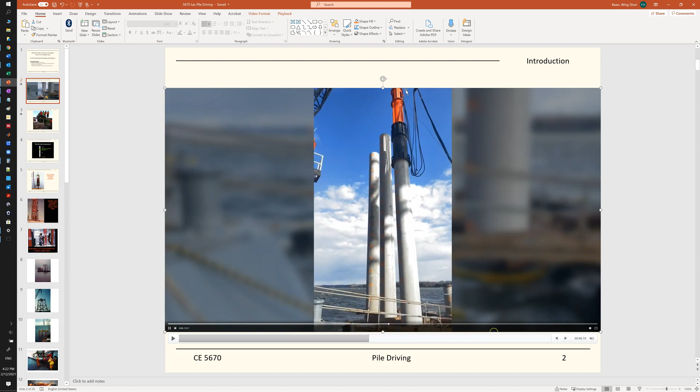This pile driving could be driving either steel pipes or concrete piles. So this is concrete piles you're seeing, but more often we do it for H piles, the steel H piles.